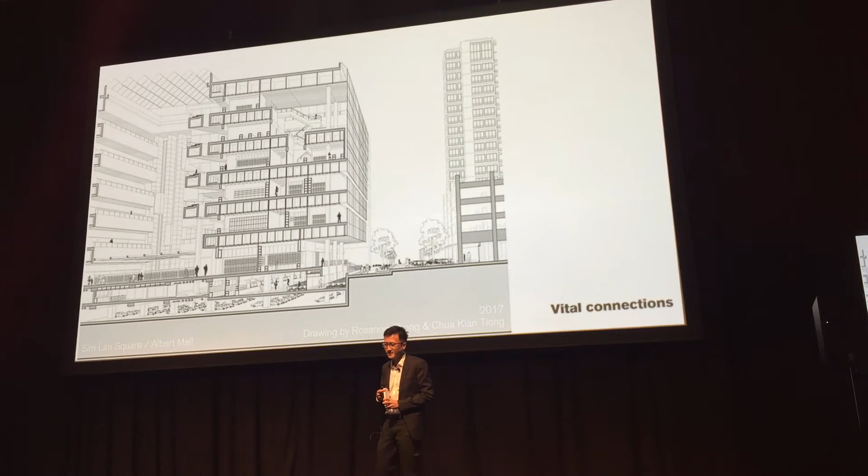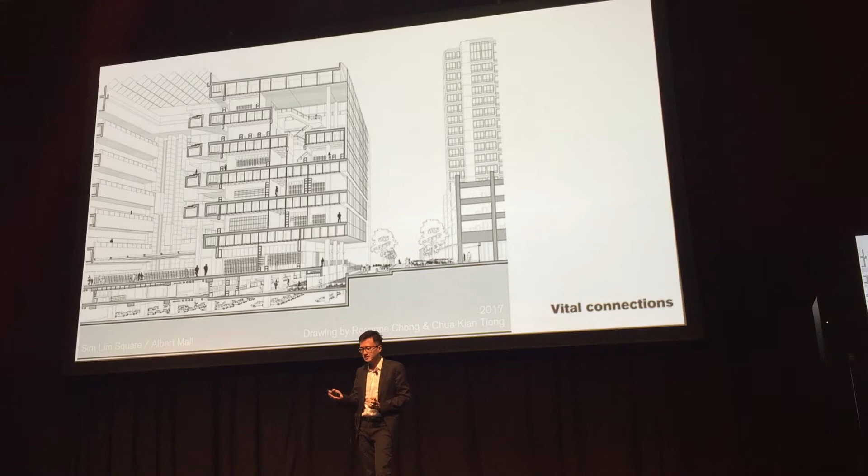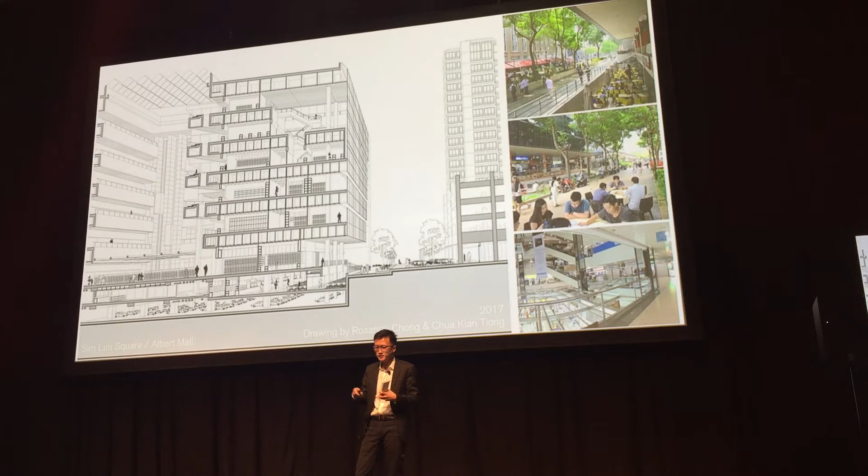Right, this is Sim Lim Square, a retail hub for computers and gadgets, completed in 1987. And of course, there's a shopping atrium, and in basement one, there's a car park that passes into a food court, and the food court slides out into the space of the pedestrianized mall, Albert Mall. Some pictures of this space. You can see through the section that the shopping atrium is made more continuous with the space of the street.

The next case study is in the east of Singapore, between East Coast Road and Marine Parade Town Centre, and there is this second-story connection that links up a series of buildings and crosses two major roads, starting from the shophouses along East Coast Road.

The overhead bridge links into Roxy Square 1, which by virtue of its site is basically a long double-loaded corridor of small shop units. And then it passes into Roxy Square 2, which is more of an atrium building. So as a pedestrian, you will have more options to circulate, but eventually they merge and emerge into a very

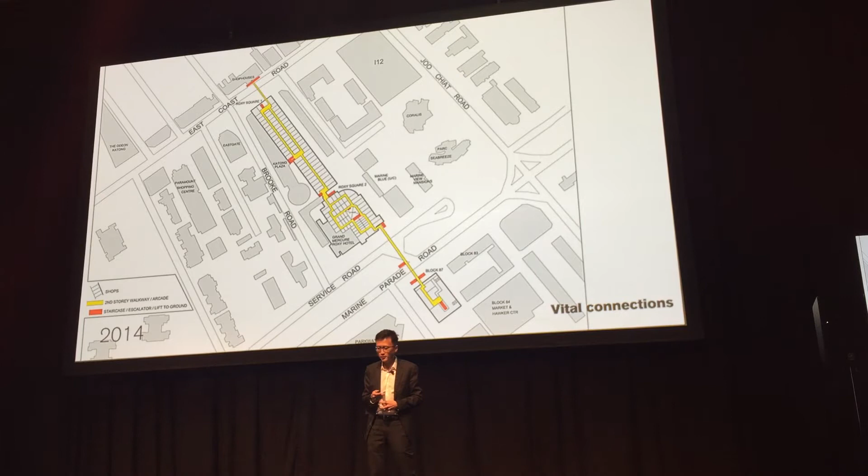long overhead bridge over Marine Parade Road, which then punches into the second story of Block 87 of Marine Parade Town Centre, which is an HDB-owned building filled with commercial tenants like tuition centres and so on. And finally, with the escalator, it drops down to a town square. So the red parts are either staircases or escalators.

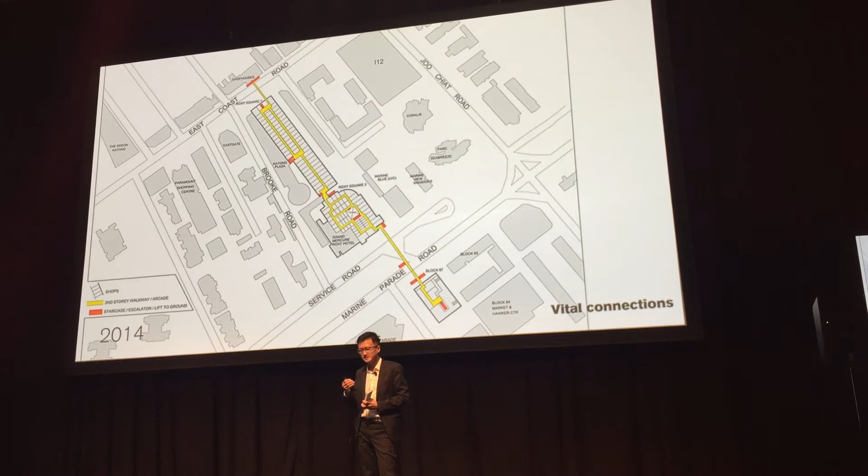So for those of you who know this place, I happen to live around the east, so that bridge is no longer there. Right now, the Thomson East Coast Line is under construction. And the crossing of Marine Parade Road will now be replaced by an underpass integrated with the MRT station.

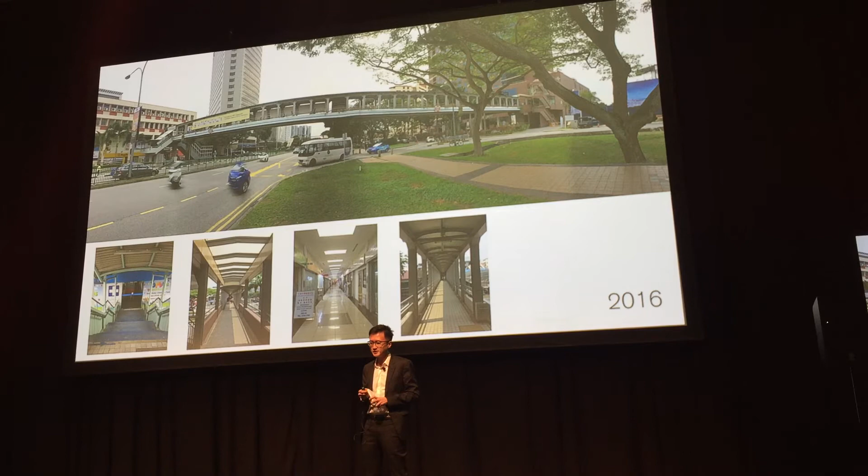And where the second story connection used to end, in Block 87, which is a lower building in this picture, where it lands on the ground as this town square. And next to it, there is a very strong building, Parkway Centre. It is by Architect Tenggara.

And it features a glass atrium that runs the full height of the building, a naturally ventilated atrium. By the design of the glass enclosure, it draws air in from its bottom and then expels it on the top. And also by its design, it allows space to be seamlessly connected to the town square. This building has character, is strong, but at the same time, it's seamlessly connected.

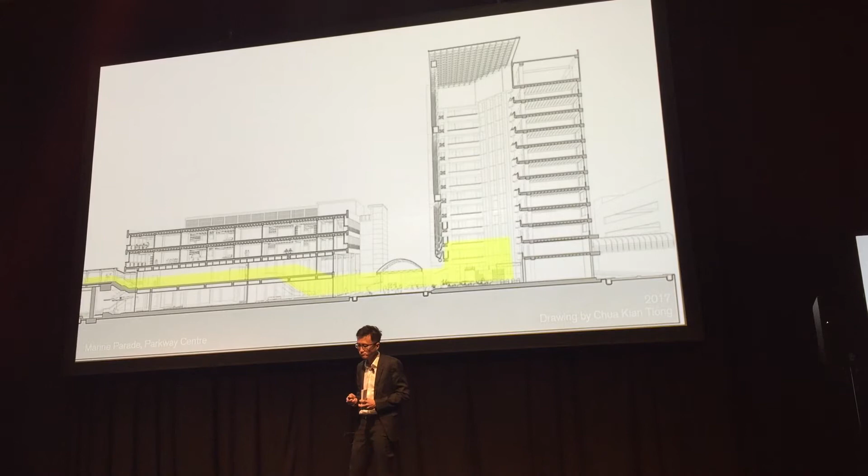And last, a new building by RSP is Waterway Point in Punggol. It's basically a shopping mall in a podium with, I think it's 11 condominium towers on top of the podium. And the nice thing about this is Punggol MRT leads to a promenade that runs through the shopping podium, goes down 1 or 2 floors, and ends all the way next to the river, Punggol River. And it's not just a small corridor, it's designed for double volume and 6 meters wide and so on.

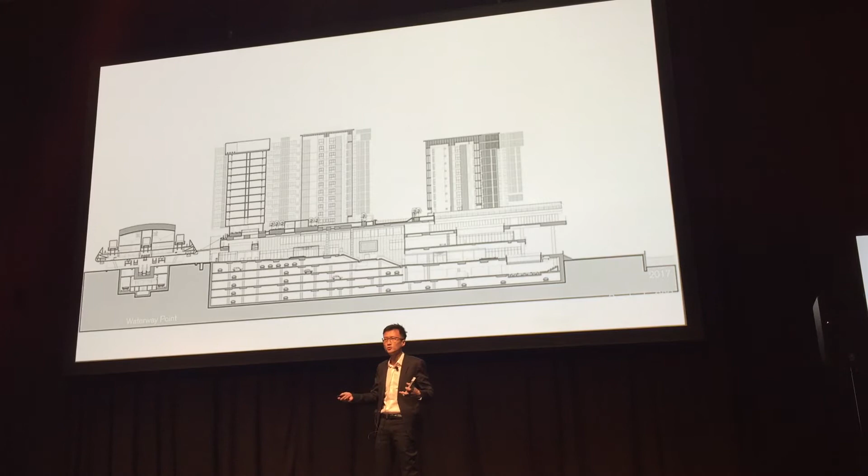So when we have to work with an old building, what do we do? I think there are 2 things. The first is to precisely identify the conditions and surrounding context that has changed around this building. The second is to figure out the connections of this building to other buildings, this building to the city.

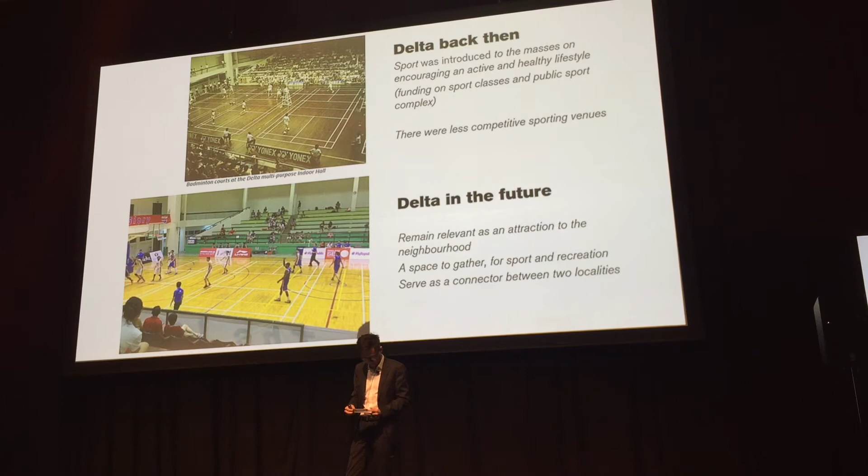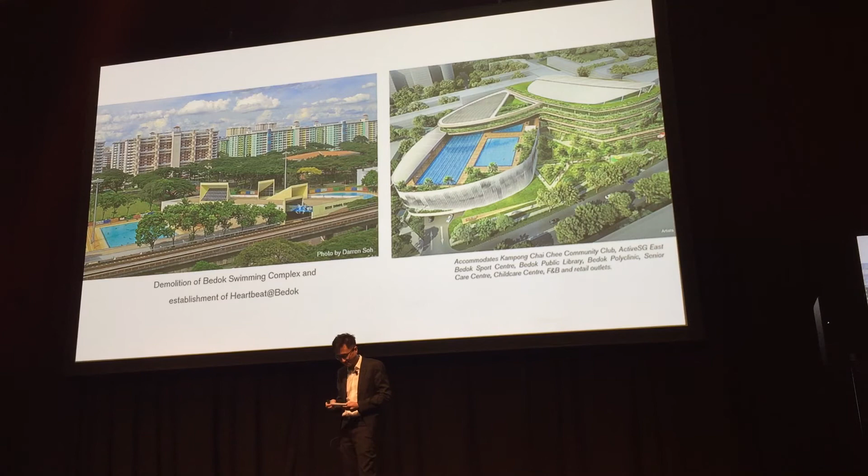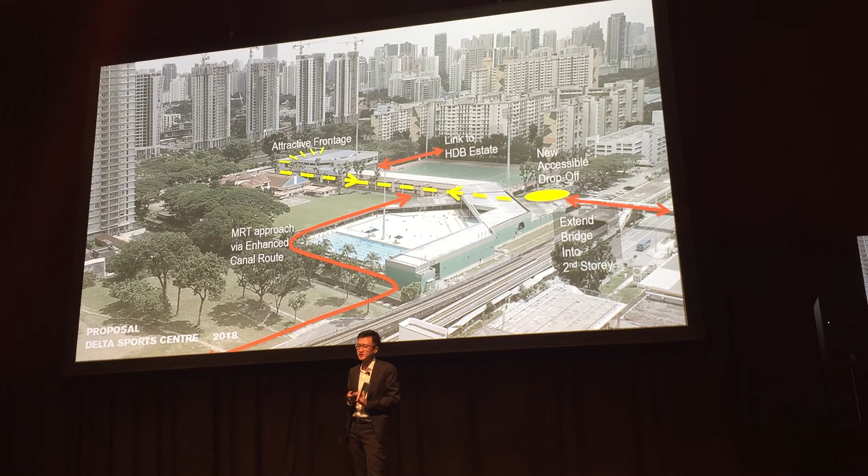So what used to be 3 facilities that seem to operate rather independently, you know, if you come and play badminton, you won't really go over to the swimming pool. We want to make it into one integrated center, and the instrument to do this is a second-story bridge that starts from the other side of Tiong Bahru Road, where there's Redhill Market, through to overlook the swimming pool, going past it and along the hockey pitch, also on the second story, and then ending at the badminton hall.

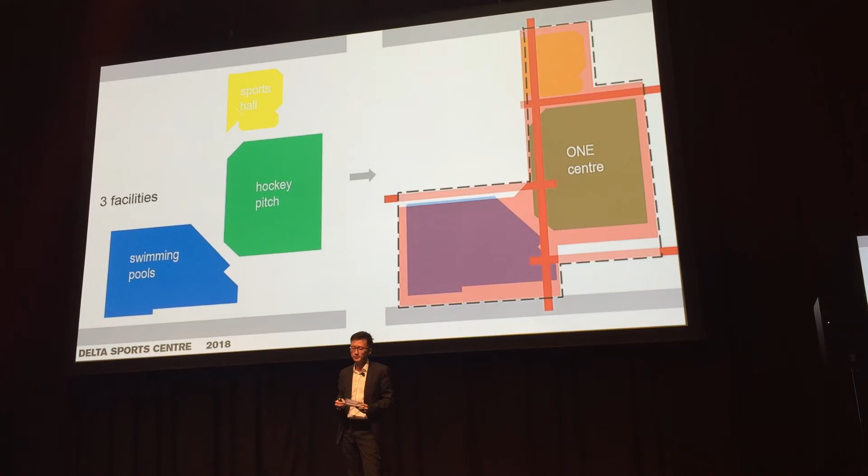This is the plan from 1979, and you can see on the Tiong Bahru side, there's a road that comes right in. So it really had a frontage. And you notice the tiered seats in the sports hall and the spectator stand. In the new plan, working from left to right, there is a lay-by that comes in from Alexandra Road that actually cuts the sports hall from the bus stop.

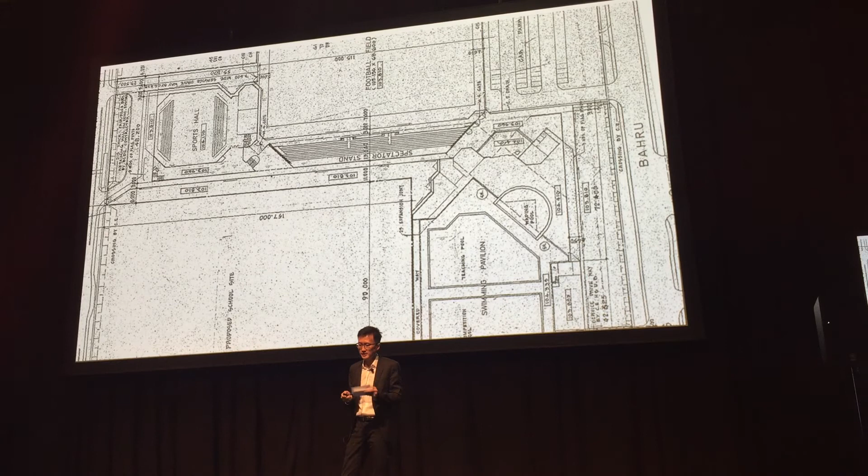In our proposal, we are paving it, taking away the driveway, and by taking away the tiered seats, we are making a cafe and also a main entrance that comes right in from the bus stop on Alexandra Road. Also for the hockey stadium, we are taking away the tiered seats and increasing the capacity by putting in 4 futsal courts or 2 hockey 5 pitches. And the swimming pool side,

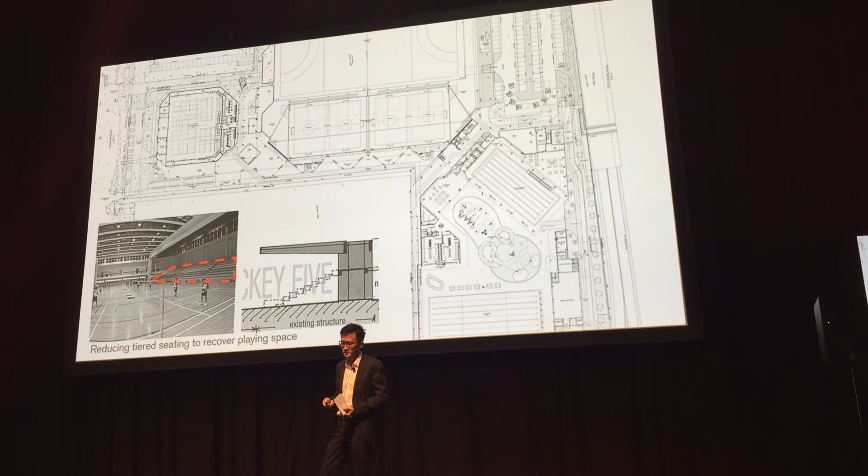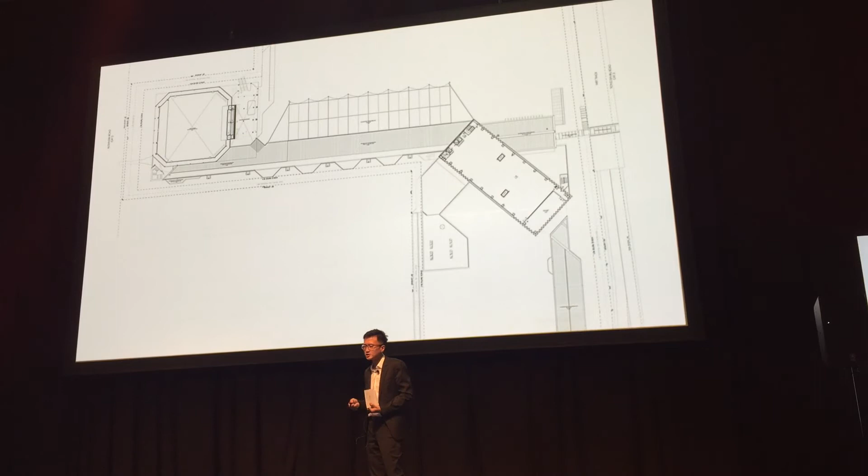or rather on the second story first, you can see the bridge coming in from Tiong Bahru Road, overlooking, and then going along and all the way landing on the sports hall side. And on the third story, our main formal addition is this thing that pivots from the main axis to look over to the other side of the MRT track.

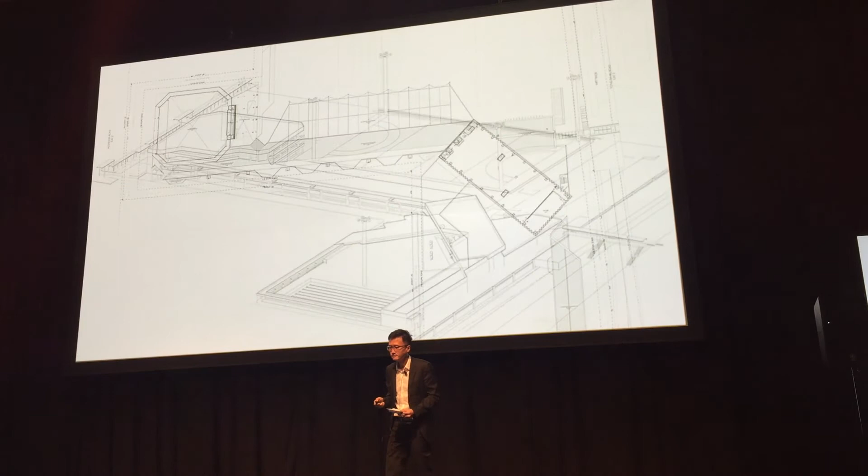Isometric. Okay, you see what the form does by kind of twisting to the 45-degree. It actually avoids the main concrete structure that is coming out from the underground.

Quickly run through some perspectives. The opaque wall and what we're proposing with the dance studio, and also the tiered seats taken out, affords us that entrance, the frontage.

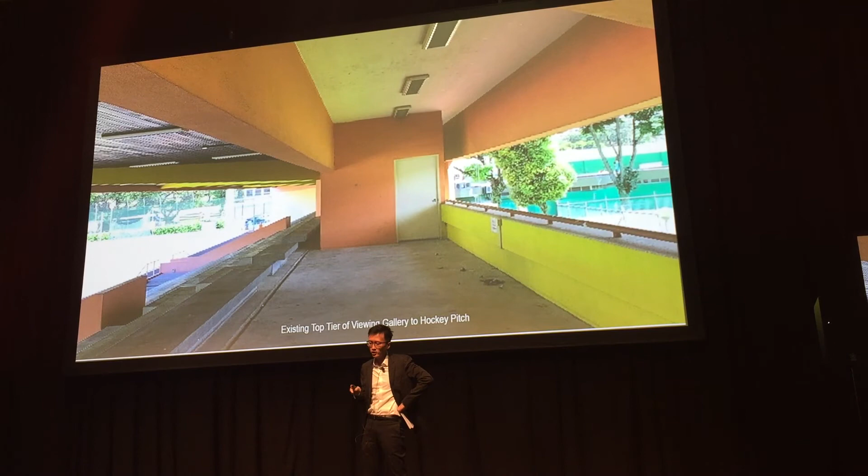This is facing an HDB estate. We are going to take away the third story slab, leaving the second story and the roof, opening up all the walls to create this elevated plaza accessible by a long ramp. And what used to be the hockey stadium seats, we are keeping the top landing and reconfiguring it as a bridge that links the two sides.

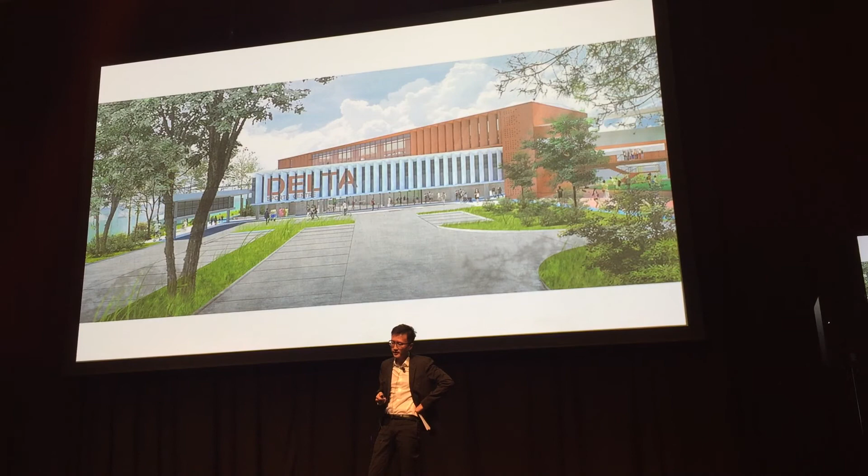This is going to be the approach for people who drive at the swimming complex. The project is now in procurement process, and you can take everything as provisional, because I hope it will be built as it is now, but you never know with the procurement process.

Okay, while the Delta is a real project underway by Red Bean Architects, Golden Mile Complex, this next project I'm going to talk about, is a paper project. The building is under threat. The owners have reached an 80% consensus to take it to the market, looking for an owner to buy it over, and the obvious solution we know in the industry is to tear it down and rebuild something.

I'm part of a group of people lobbying URA to gazette this. What we've done is we've started a letter and approached the public for signatures, and we have submitted it to the minister. And so the case is being evaluated now. The idea is that it can go en bloc. Okay, it will put it under a new owner's hands. We're okay with that, right? But the conserved building will be the center of the redevelopment effort. And the new owner will be able to reconfigure, reprogram, update the finishes and so on.

So this used to be called Woh Hup Complex, built in 1973 by DP. I think we are quite familiar with it. On the seaward facing side, the sloping terrace affords panoramic views, balconies for the residential units. On the other side, the sloping terraces conversely provide shade for the offices facing the west.

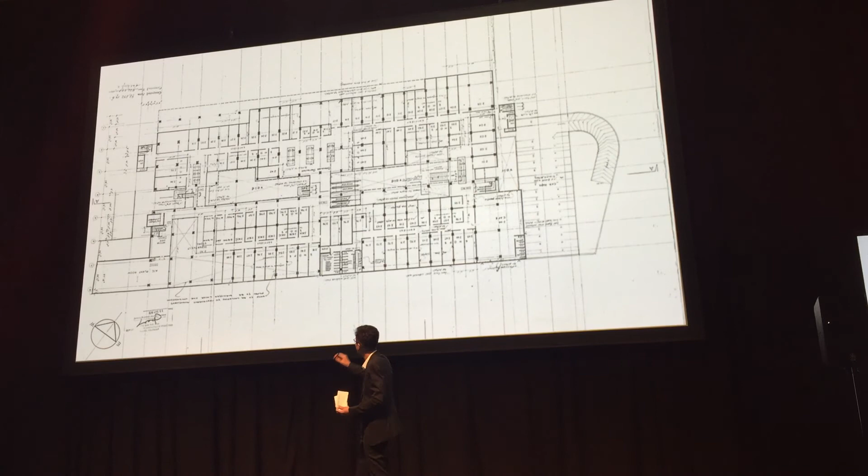And the idea of getting a linear axis through the atrium is followed through. If you go to the building, there is a three-story high glass wall at one side. But what you see when you look through it from the atrium is a 5-story parking deck of Golden Mile Tower, and that space is currently a loading bay and a refuse chute

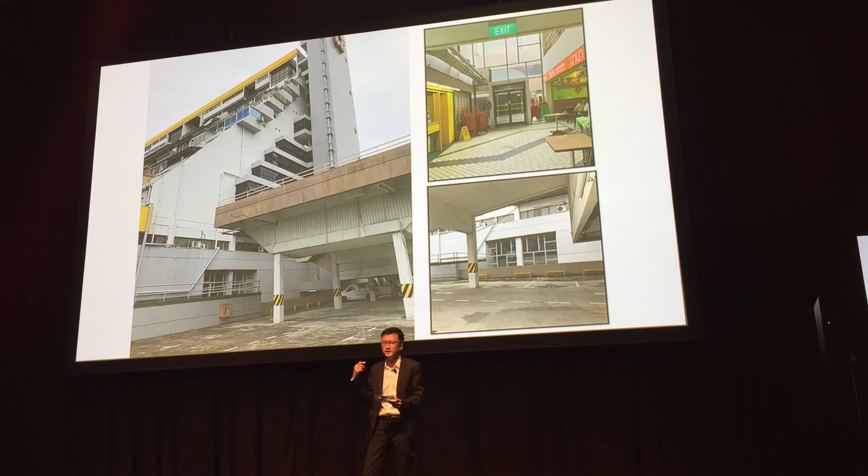or refuse center, right? And the other side, you have the same grand glass, same design, right? But it's blocked by the aforesaid parking structure. The atrium is lively. It has an enclave character to it.

But it feels enclosed and self-sufficient. And I believe the way the space is set up leads to how it's occupied. With both openings choked up and the building being at the tail end of Beach Road, this seems like a good place for a community to make its own sanctuary.

This may currently be its charm and character, and I have nothing against it, but I'm not sentimental about it. Because it is clear to me that this enclave character, arising from the incomplete resolution of the original architectural idea, remains a weakness in our case to conserve the building.

So what we do with the adjacent plot will have an impact on the future of Golden Mile Complex. It is not actually about the building itself, but what we do next to it that will ensure its future relevance. The solution is really to make a continuous Golden Mile, not a disconnected string of interesting looking objects. I will end with a series of diagrams to show a very simple idea.

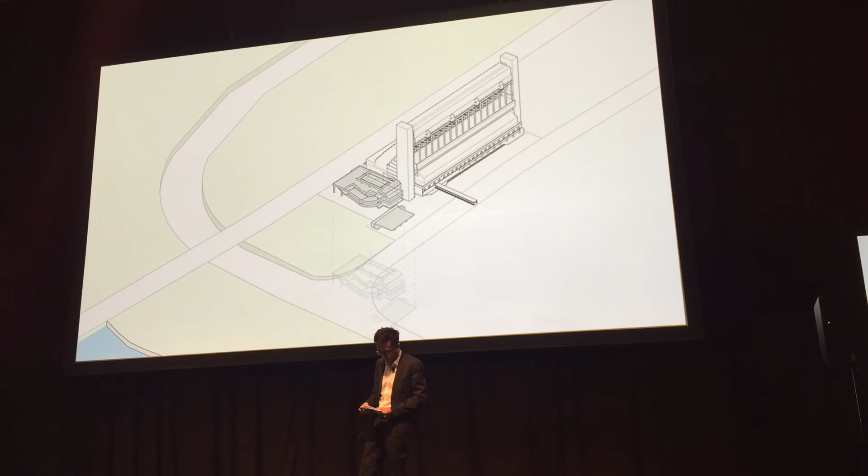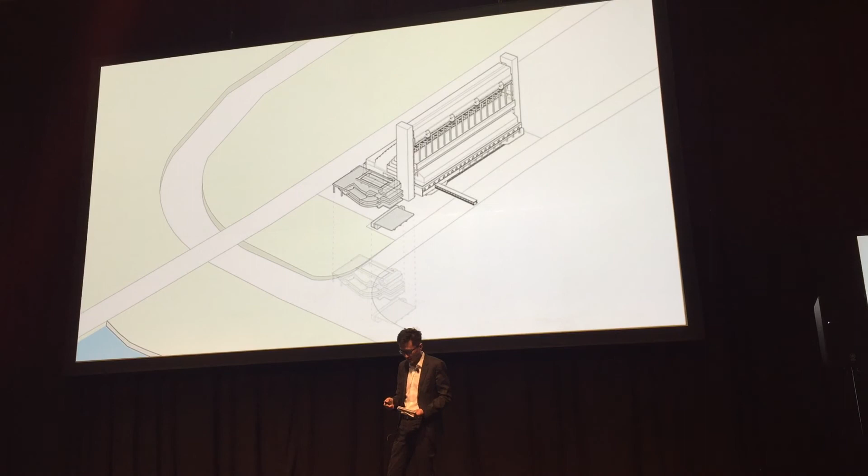To chop off the parking structure and gas station, which as I said was extraneous to the original architectural idea, and anyway these may soon be relics of 20th century transportation. From recent advancements in self-driving, electric cars, ride-hailing, the car park and the gas station may soon become obsolete. So why not? We free up the atrium on this end,

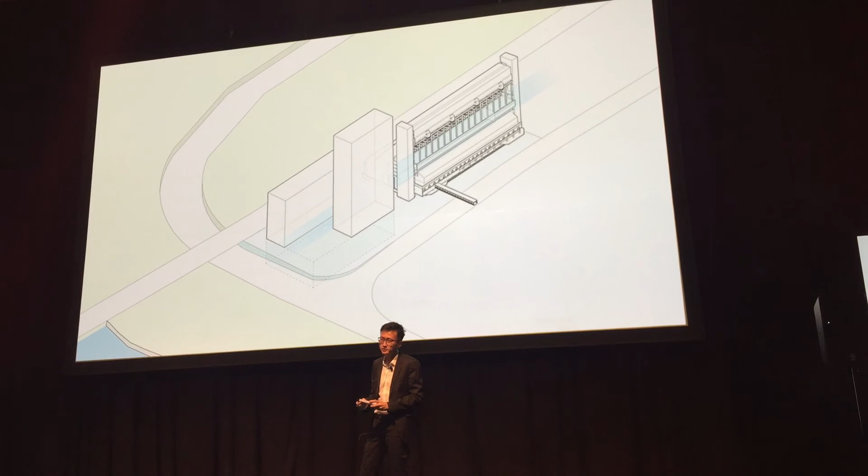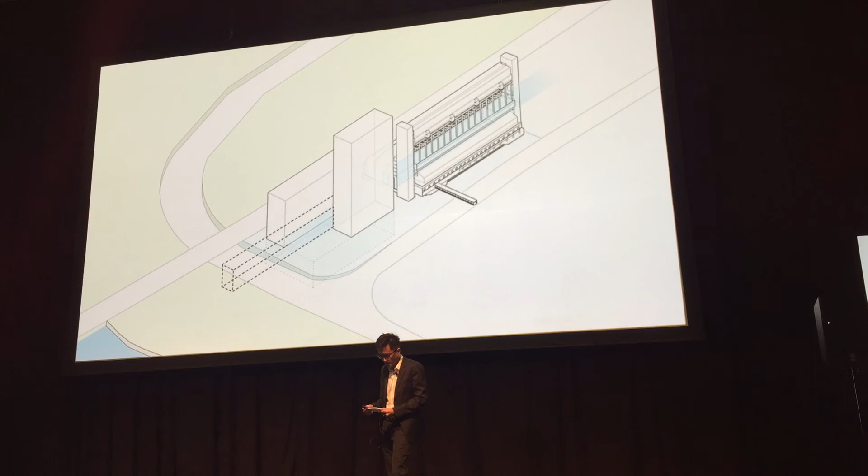set this guideline for the neighbouring development, that the building on the adjacent site will need to incorporate a central thoroughfare, continuous with the atrium of Golden Mile Complex. And it doesn't end there. A 2-story high bridge with programs can be built across the sunken road and onto the riverfront, connecting to another urban network of the park connector, for which Singapore is so successful. If needed, an underground car park can be built in a new site to serve both buildings.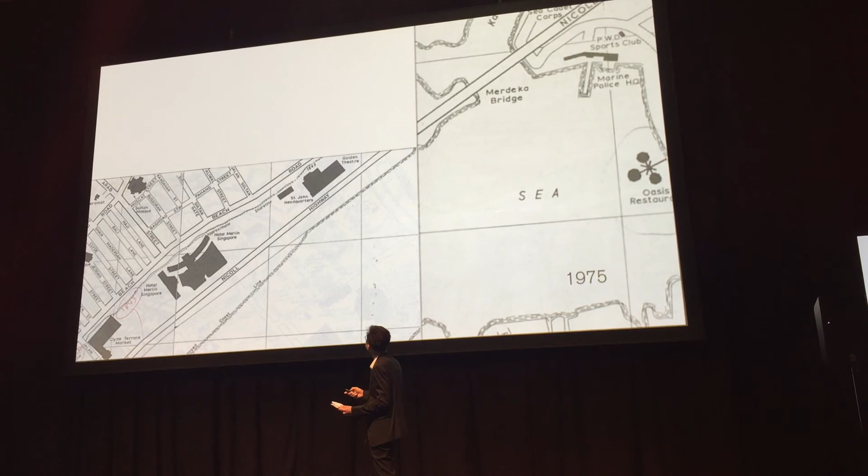And this is just a quick proposal. While the coastline has been extended and land has been added for future development, we can still safeguard a green space in front of where the Golden Mile Complex terraces are facing.

With the new developments along the coastline, however, the Golden Mile will now need to focus ever more on the lengthwise axis along Beach Road and not to the beachfront frontage, because there will be new, higher, denser buildings there for sure, otherwise why would we reclaim the land? Nicoll Highway, nevertheless, remains hard to cross, and therefore the outlet to the waterfront becomes important. Last few slides.

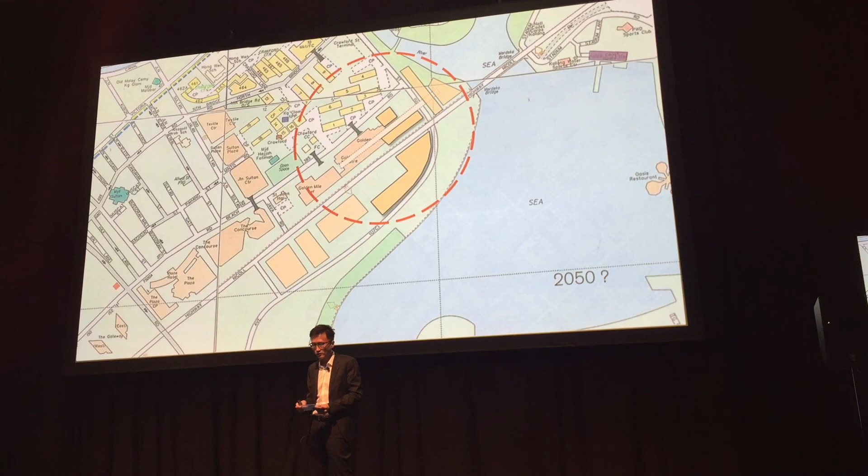Golden Mile Complex can be the heart of a new commercial district, infused with the mark of our nation-building courage and imagination, rejuvenated and integrated with waterfront urban living. This district will be so much more interesting than if it was built on empty land, as it will be a mix of history and new ideas. There will be apartments, shops and offices.

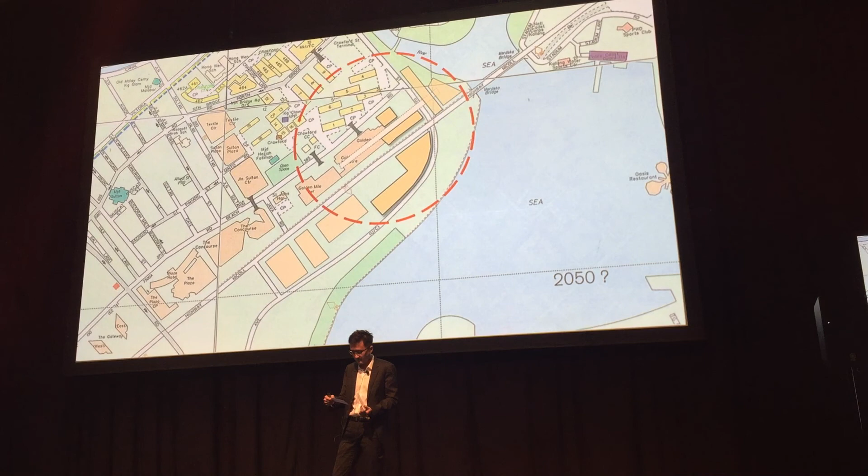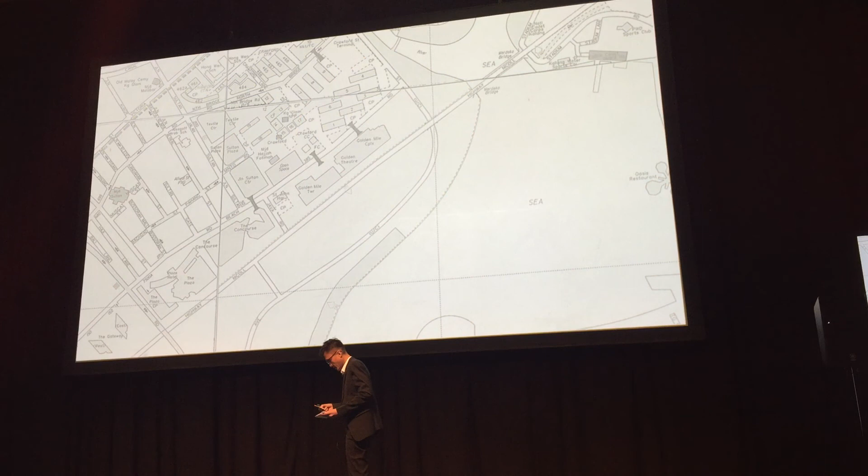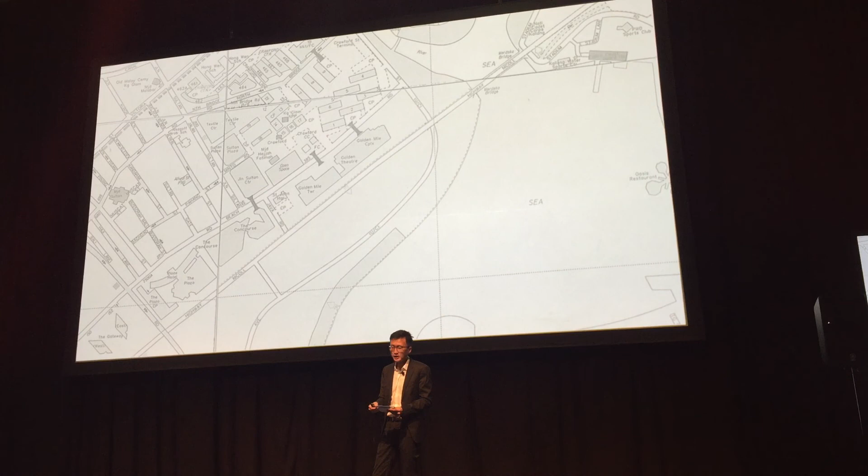This quick proposal shows that the future of Golden Mile Complex, or any other worthy old building in fact, cannot be considered in isolation, but must necessarily be supported by how the neighbouring developments are conceived. So we have now close to 50 years of buildings, a mix of many generations. They stand together, perhaps a little bit uneasy, not sure if they are welcome. It is up to us, intelligent architects and planners, to really stitch them together, to observe them and see how to make sense of them. Because how many more times can we erase and start again?

I will end by reading out this concluding message that I wrote. How we act in the period we are in now, between conservation of our modern landmarks and adopting tactics of adaptive reuse to bring out character of existing fabrics while stitching the city together, post-tabula rasa, post-speculative real estate, will define our city and will define us. These two efforts running concurrently will be our mode of resistance, looking back and looking forward at the same time. We are making history every moment.